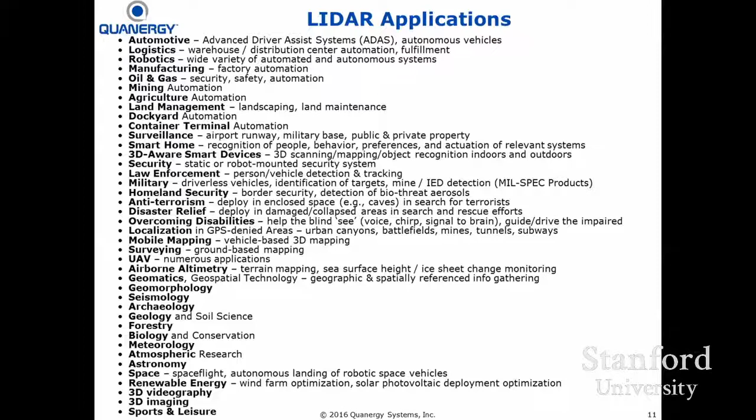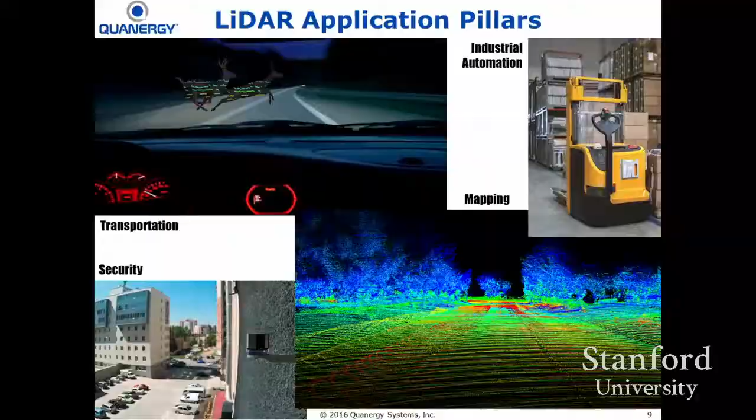And smart IoT is just such a broad space, and ultimately will change lives as we know them. We address many markets. Let me jump ahead, show you the big boring bullet list. It's going to make you dizzy. About 3 dozen different applications. We bucket them into 4 pillars: transportation, very broadly defined; industrial automation; mapping, terrestrial and aerial; and security. Security is defined as everything from smart home to smart cities to smart borders.

And here are some examples of applications, and I point your attention to the fact that, for instance, in vehicles, that's almost obvious at this point because we talked so much about this. It's such a hot space. You probably have a good idea how that's used. But as you can imagine, also every drone company wants to work with us. You have the lightest weight, lowest power draw, highest resolution, lowest cost sensor, smallest size. So that's a no-brainer for drones.

And ultimately, we're going to be able to fit in a handheld device, in clothing, and so on, when the whole device is on a single chip, which pre-packaging has about this size. When you package it, it's a few millimeters thick, and now you have high performance type of LiDAR. This is not like the gaming LiDAR you can buy these days that has only a 10-foot range, that works only indoors when there's no sunlight, and that has low accuracy. If you walk around the house and you come back to where you started, it looks like you're off by 10 feet and so on.

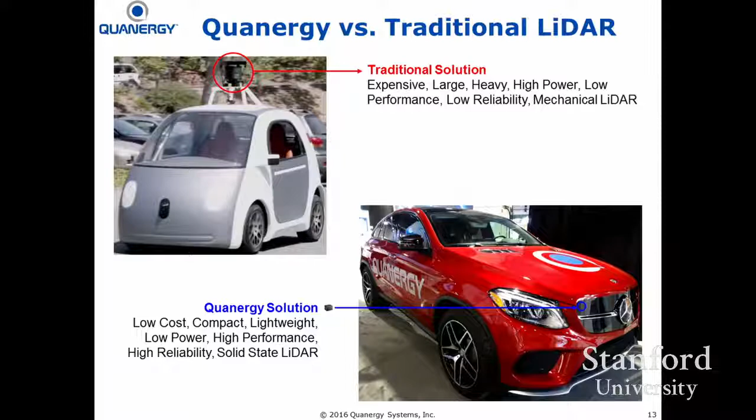This is our roadmap. So I have to say the first LiDAR we made is also mechanical because it's easy. We were able to get to market quickly, and we still had the smallest size, lightest weight, lowest cost, highest performance, highest reliability, and lowest power consumption compared to any other mechanical LiDAR. But still, it was mechanical. It was not solid state. Solid state has all these advantages to a greater extent, and it is completely solid state.

Ultimately, everything will be on one chip. You embed that in a cell phone, in your clothing, in your hat. I mean, when you think of the applications, this can make blind people see. You can send a chirp or audio or some kind of even a brain signal that allows a blind person to see. The applications are almost limitless.

And as I point out here, the video cameras will be integrated in this just for color. Everything we're doing now and we'll do in the future will be all solid state. Our first vehicle, which was also a gift from Mercedes-Benz, we mounted our mechanical LiDARs on it. They're smaller; they're about the size of a small coffee mug. But still, it was sitting on the outside on the baggage rack. It's not as easy to integrate that into the body of the vehicle. But that's just the Gen 1, which is not for automotive applications. That's still fine for security applications, static applications.

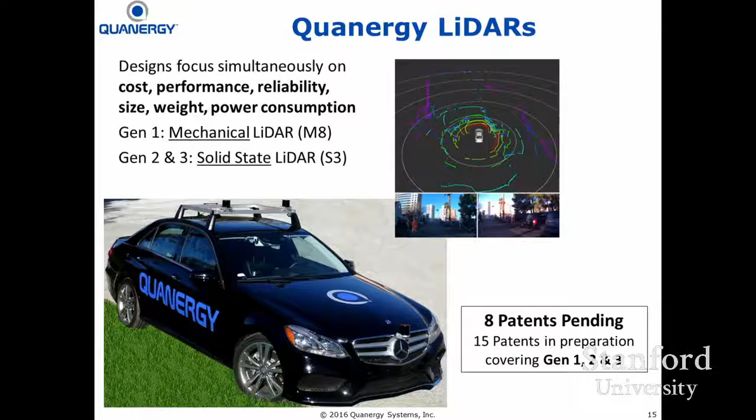We have 8 patents filed. They should start issuing soon. The company is 3.5 years old. We started to file patents about 1 year into the company, and over the next year they should start to issue. We have about 15 more in preparation. You've seen this, you see the real thing here, so you don't need to spend time on this. It's 9 by 6 by 6 centimeters.

So the principle of operation: it's an optical phased array. An optical phased array. You can take pictures if you want. We're going to give you the slides as well. Yeah.

Basically the business part is this chip here. I don't know if you can see from afar, but the business part is this piece of silicon that's about 4 by 4 millimeters. How many arrays do you have there? See, this is one array that scans in the 2D space. This has a 120 by 120 degree field of view.

This is, of course, a cartoon. The actual circuit is a lot more complex. When you add the different layers, there's the photonic circuit. There's the interconnect layer to bring the control signals. There's the actuation elements and the out-of-plane coupling that sends the light from being guided inside the chip to come out basically normally to the chip.

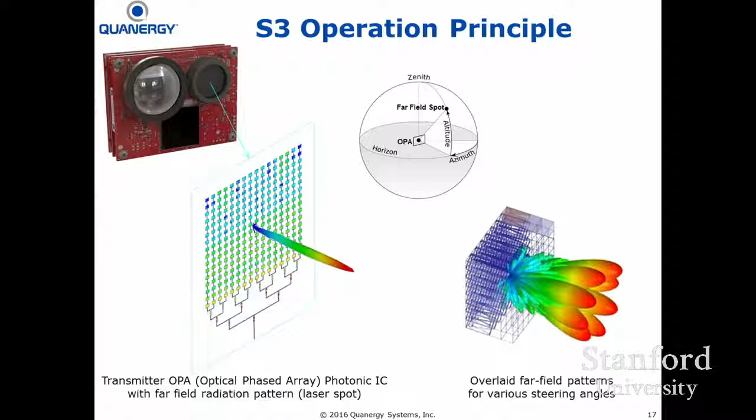And now those beams, by controlling their phases, we can get them to create a spot size of any size pointed in any direction within the entire field of view. That gets calibrated once in the factory, and it's good for the lifetime.

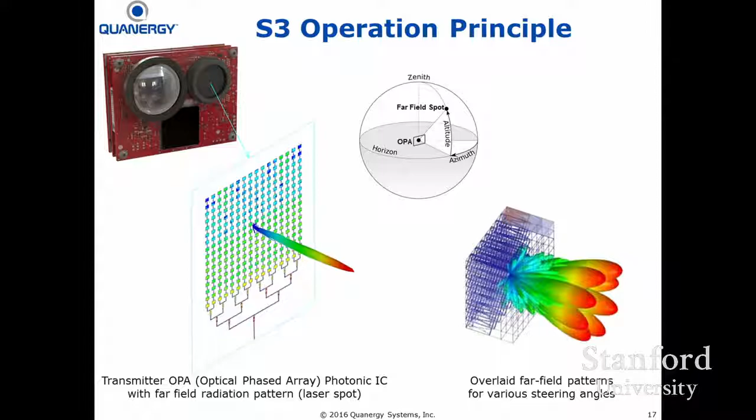Some unique capabilities that no other LiDAR has, only because this is solid state. You can adjust the window of interest within the field of view. So if the unit gives you 120 by 120 degrees, you might say, I'm interested for this application in 120 by maybe 10 degrees, if it's a vehicle looking mostly at the horizon and so on.

That's actually a question I had for you in terms of mining. If you're using the controller, is Rio Tinto Mining Company the firm you guys are using with your earth movers and stuff like that with your LiDAR? I'm sorry, what was the question? I was just wondering if the Rio Tinto Mining Company was the company that was using your LiDARs on their earth movers. No.

Let me think if any mining company. I'll show you some customers whose names are public. I'm not gonna disclose any customer names where we don't have their approval. None of the mining companies gave us the okay to disclose their name. I can tell you our top two mining companies: one is American, one is Japanese.

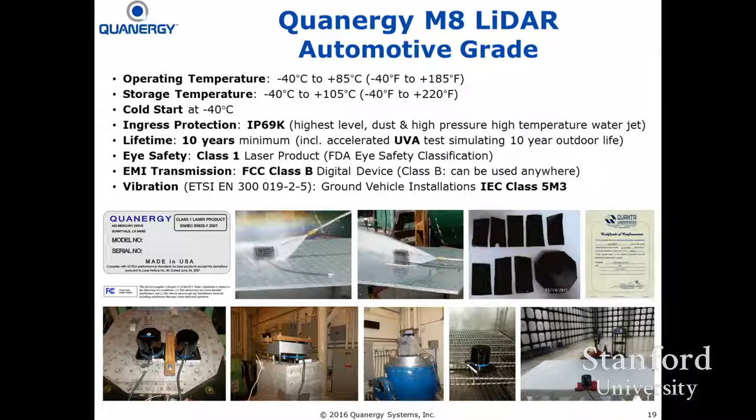Any LiDAR we do, it goes through the full battery of tests you have to go through to be qualified to be automotive grade. This is what we did on the mechanical LiDAR. Operating temperature, wide temperature range, vibration, shock, ensuring it's eye safe under all operating conditions. Lifetime, UV exposure, direct sunlight for the entire lifetime, and so on. That's our first vehicle, with the kind of data you see in it. As you're driving around in real time, you see the different layers from each LiDAR.

One of our customers, Renault, the sister company of Nissan, basically used 4 of our LiDARs. This was the mechanical LiDAR. They put them in 4 corners and they drove around. It turned the vehicle into an autonomous vehicle. They did some highway driving, cone detection driving. They were up and running very quickly because they took not only our hardware but also our software, our perception software, and they were able to collect nice videos. Any snapshot I have of a video, I actually also have the full video on this laptop. So if we have time at the end, if you're interested, I have tons of videos.

Let me just keep track of time. 300 meters is the maximum range. What's the minimum range? Oh, good question. The minimum range for the mechanical LiDAR, which is the one used here, is 1 meter. The minimum range for the solid-state LiDAR is 10 centimeters. So if it's mounted, let's say behind the grill or in a bumper, the way we mounted it in the red SUV, it was behind the grill, basically, if you stand right against it and your legs are touching the bumper, you're more than 10 centimeters away from the sensors.

So in terms of time, okay, we have till 5:45. Yeah. 8 in the morning. Camera will go off. We have some time. Is that right? Okay. So this is beaming to where? All around the world. Is it streaming live to folks who sign up for this? Yep. The camera will go off, and then you can tell us the real truth. For the record, I'm telling the real truth. I'm not going to joke about this. That's no joke around here. Friday, you can say April Fools, you made everything up. Two more days to that. It's March 30th today.

ADAS, as you know, is Advanced Driver Assist System. We can support all the ADAS functions, and you can see them here: lane keeping, park assist, and so on.

Can you do bus detection? Did you say bus? Yes, remember Google? He couldn't tell a bus from another bus. Can you do bus detection? Yeah. So, in all fairness to Google, this was... I know, it's software. Bad joke, sorry.

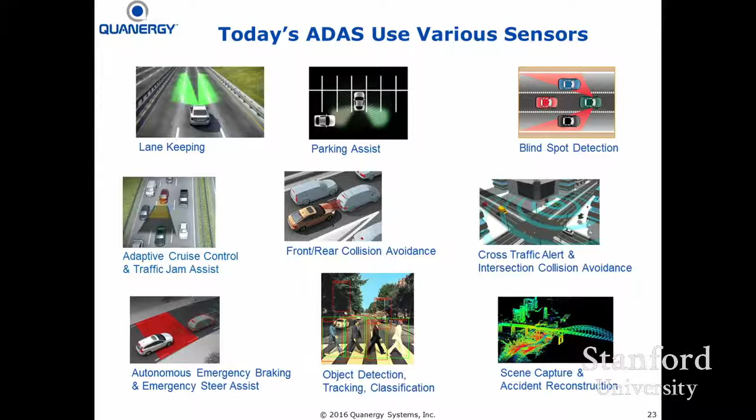Yeah, the algorithm was programmed to assume that if you pull in front of a bus and it's doing less than 20 miles per hour, most likely it's going to slow down. They have not seen how bus drivers drive in the Bay Area. Talk to a bus driver, clearly. Yeah.

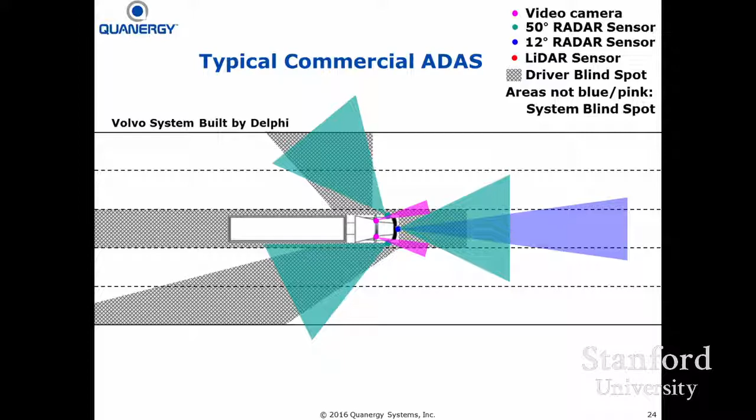In all the ADAS systems, you typically had some long range, narrow field of view, short range, wide field of view radar, and some video cameras, and might have a configuration like this. Everything in color can be seen. The hashed areas are the blind spots, so you don't have full coverage of the blind spots, and you certainly don't have any visibility for what's coming at you at an intersection from side streets. With two LiDARs, you get this kind of coverage all around.

Hold on. How are you getting straight behind? This is a military truck, and we put the LiDARs on the roof. Oh, okay. Because the sensors, you can't put them behind metal. Right, it's line of sight. It does not go through metal. Right. So with a passenger vehicle, you have to worry a lot about the aesthetics, the aerodynamics. But a big honky truck, you don't care. This is like a deuce and a half, 2.5 ton military truck. So if you stick them on the roof, when you get beyond the shadowing effect, you start to see the back.

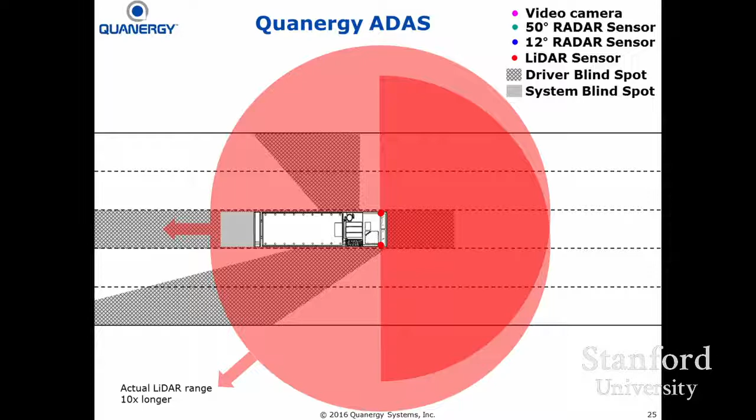Will you be getting into the actual technology of what makes these things work and how? Yeah. I'm covering the hardware. I showed what the chip looks like and how it works and so on. We'll get into it. We still have 25 minutes. Yes.

This is the configuration. So very quickly, I mentioned previously a typical configuration made out of 8 cameras, 6 radars, 12 ultrasonic sensors. If you add a mechanical LiDAR, you cannot use it to support a safety critical function by itself, so you only add it on top of the existing suite. If it's a solid state LiDAR and you can count on it running reliably, you drop most of the other sensors. You keep 2 radars. So a system that's basically the kind of autopilot system you hear about these days, that works on the highway on a sunny day if there's no shading from a tree, costs about $4,000 total. You add a couple of LiDARs. If it's our mechanical LiDAR, you add 2,000. Other mechanical LiDARs, you add 2 times 8, 16, so it costs 20. And the solid state LiDAR plus 2 radars is $1,000.

How many nines does that get you? You said 10 nines is what you need for autonomous. How much would that system you've got up there for 1,000 give you? Yeah, our goal is to get to 10 nines. I know it's very challenging. We can get 8 nines, and we have to keep pushing the technology.

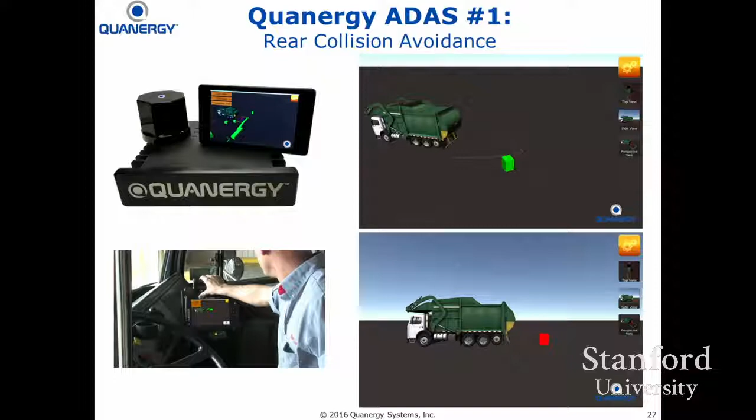We have our systems on the garbage trucks of the city of Sunnyvale. Sometimes a garbage truck is backing up out of an alley and they don't see well what's coming at them, and they get into accidents and so on. I can give you lots of scenarios. We can do object detection, tracking, classification, color coding for each object. You track it and you do scenario analysis, and then you decide on an action plan based on the scenario. Actual trucks of the city of Sunnyvale, with Specialty Solid Waste and Recycling. You see, there's one LiDAR here and one LiDAR here.

City of San Jose is mapping a corridor for us. So we launched the solid-state LiDAR at CES. This is Dr. Michael Hafner, who's the Senior VP of Products at Daimler, co-announcing with me on stage at CES the solid-state LiDAR.

So this was a big deal for us because this is what we are all about. This is what allows us. This is the entry point into all these applications. Then we make the solution robust and powerful through software, but this is the enabling technology right here. I showed you this vehicle that they gave us. It was running live at the CES.

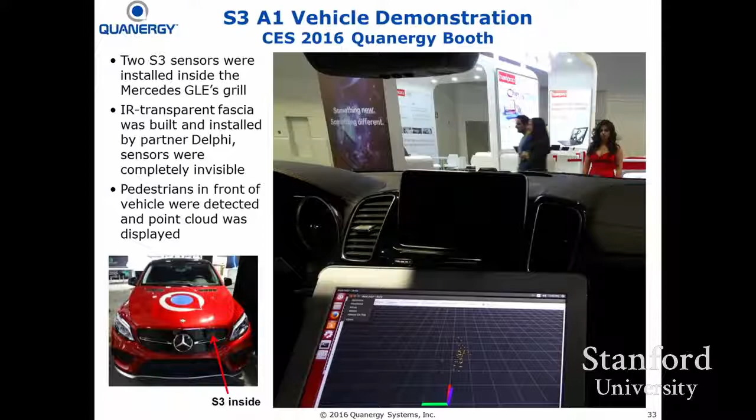How does the sensor work? Let's focus on the solid-state sensor because it works differently from the mechanical LiDAR. The mechanical LiDAR is much easier. Of course, but we were interested in your product. Oh, they're both our products. We also make a mechanical LiDAR. I'm sorry. That's okay.

The mechanical sends one pulse, detects it with an APD, measures the time of flight. It's a time of flight measurement. This is also time of flight, but this is different. Here, the detector operates in Geiger mode, the digital mode, which is basically photon counting mode. That's why the company is called Quanergy. We count quanta of optical energy. So you are quantum limited? Close to quantum limited.

Once you detect a photon, there's what's called a dead time. We're trying to make that as small as possible to be able to count the next photon. We send photon pulses that are coded. So that's a pulse train, typically about 10 pulses per shot. That's coded.

So when the signal comes back, we have a match filter that detects the signal out of the noise. When you look at the signal coming back, it looks like all noise. But when you run the match filter, it picks out the signal based on the code. Pseudo-random. That's exactly right. As GPS does these days. So that's the process: pulse train, coded, and detection. And we do spatial-temporal correlation to ensure that we are detecting a real signal, not a false signal.

So we have a SPAD array, single photon avalanche diode array, on the receiver side. Behind it, there's an ROIC, readout integrated circuit. Together, detector and ROIC make a receiver array. We do the single photon counting with the SPAD array. Any SPAD array has an active area and an area that has the circuitry. So you have a fill factor for the active region. Often the fill factor is about 5%. We have 25% fill factor.

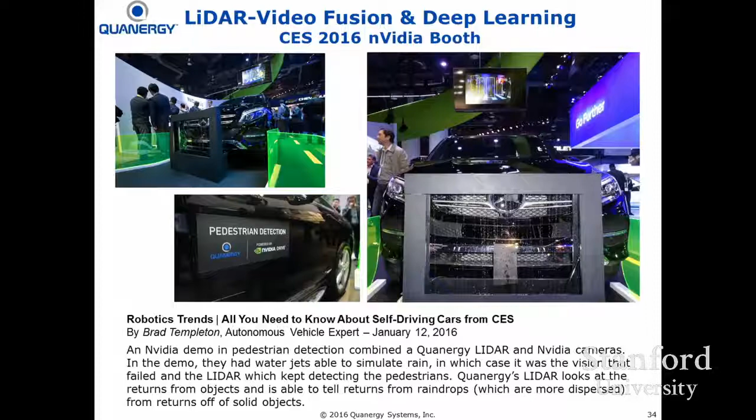And that's how you read traffic signs. You can read traffic signs based on any difference in reflectivity between the lettering and the background. But you can also do it just with video. Just use a $3 cell phone camera. But this is a situation where we said, you can count the leaves on a tree.

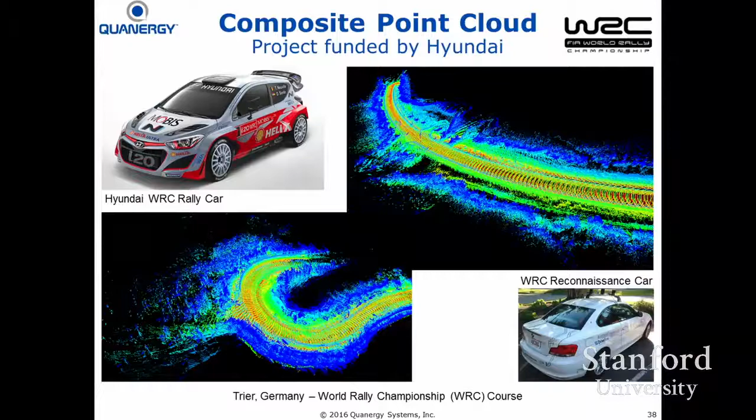We've done many applications. We pre-map a course. This is a WRC rally race course that we pre-mapped for Hyundai, so they can take very detailed notes before they do the race. It's not allowed to do it during the race, but it's perfectly fine to do it before the race, and then take detailed notes, and now use your handwritten notes for more accurate information.

We can do global positioning of point clouds. We can overlay our point clouds on top of satellite imagery, and you can see any changes day to day in the scenery, and you can position yourself and you can detect the changes.

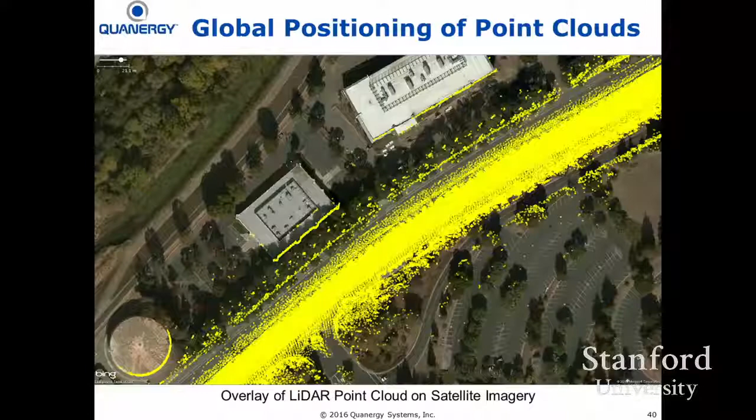Yes, sir. Isn't this all alternate representations of how your software interprets the data? I still don't understand how the sensor itself works. What are the phenomena that you're using in order to collect this data? We have a time-of-flight sensor. We have an IMU, right, inertial measurement unit, which is accelerometer and... But for instance, how many pixels, what are the dimensions of the sensor? How is it that you're determining the time of flight? What is the emitter? I don't know if these are lasers being put out, but they seem to be blasting the world with energy. What kind of energy does it take?

Okay, so what you're referring to, when you blast the world with energy, is called the flash LiDAR approach. We don't do that. What do you do? We have much smaller. We do serial illumination as opposed to parallel illumination. The flash LiDAR illuminates the entire scene with one big spot. They flash the entire scene. That means the power has to be very high.

They use lasers on the order of 100 kilowatts in power, very expensive. To make that eye safe, you go to 1550, and you cannot detect in silicon anymore. You go to indium gallium arsenide, 100 times more expensive. That's why those systems cost between $100,000 and $200,000. So what do you do? Serial. I have a small spot that hops around 1,000,000 times per second. That's what I do. They flash the entire scene.

So if you're 1,000,000 times per second and your failure rate is 1 out of 10 million, you got a high failure rate. But that's fine. That's fine because you're collecting so much information, and you're putting it all together, and it has to make sense. Especially if one false signal does not repeat because it was some random noise, then you know what you're dealing with. And very quickly, you're gonna realize that was a false return.

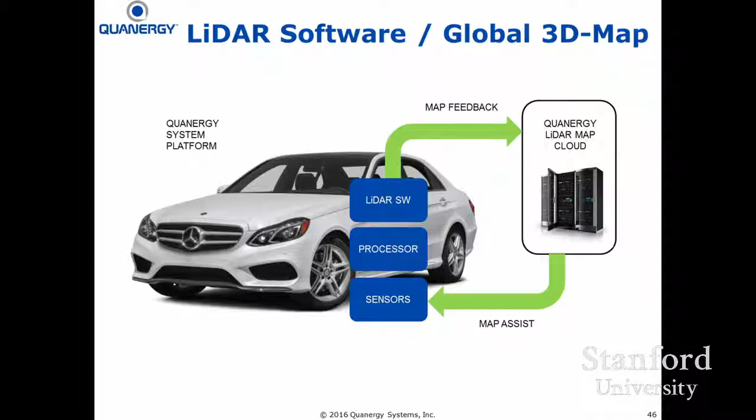So we have this ability to do real-time 3D mapping, which allows us to communicate road and weather quality conditions, traffic observations, flow conditions of the traffic, objects, accident, obstacle, debris in real time with centimeter accuracy. We build lane level street maps. The infrastructure is mapped all with centimeter accuracy. We have a full array of location-based services included in this capability.

I presume your centimeter accuracy refers to the distance, but there's also an XY. You're trying to scan thousands of pixels or megapixels in order to get a decent image instead of isolated points. How frequently do you get back to each point, and at what angular dispersion? At 30 meters, you get 1 centimeter accuracy in all the dimensions: in depth, in X, and in Y. And all of that becomes about 3 centimeters at 100 meters. And how frequently do you refresh everything with that accuracy? With every frame, and the frame rate is software controlled by the algorithm based on the scenario. It's 10 to 100 times per second.